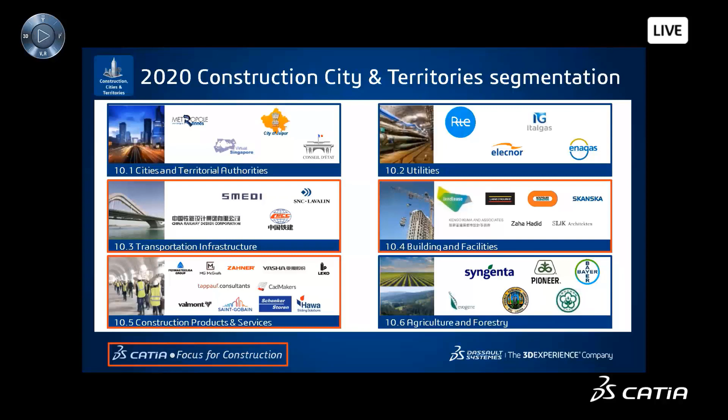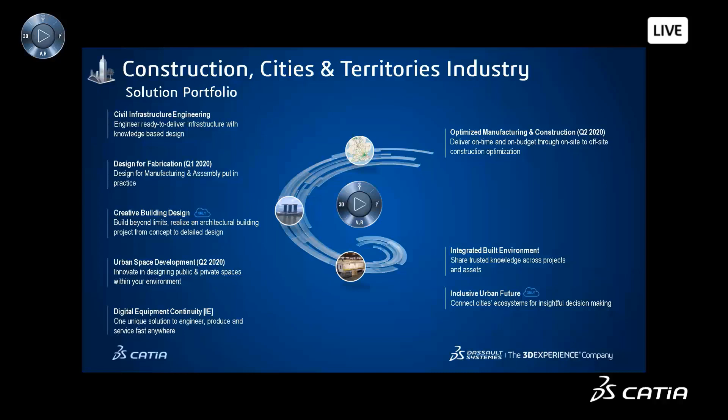Our solution portfolio is structured in a way that addresses each one of those individual segments. For sustainable infrastructure, we're looking primarily at the upper left with the civil infrastructure engineering solution.

A zoom on the civil infrastructure engineering solution, and we see that there are four primary processes that make up this solution: the civil infrastructure design process, the civil structures engineering process, the civil systems engineering process, and the civil construction process engineering process.

Each of these processes have a brand attached, and those brands are the primary supporting brands that contribute to the value of these processes.

Each of these processes then comes with a packaged set of roles, and in 21X, we have completely re-engineered our role portfolio to be industry specific.

This was already the case from CATIA back in 2020X and previous releases. But for 21X, we've taken it one step further and greatly enhanced the portfolio.

So in re-engineering our role portfolio for 21X, we've taken the principle of continuous level of development as a guiding force.

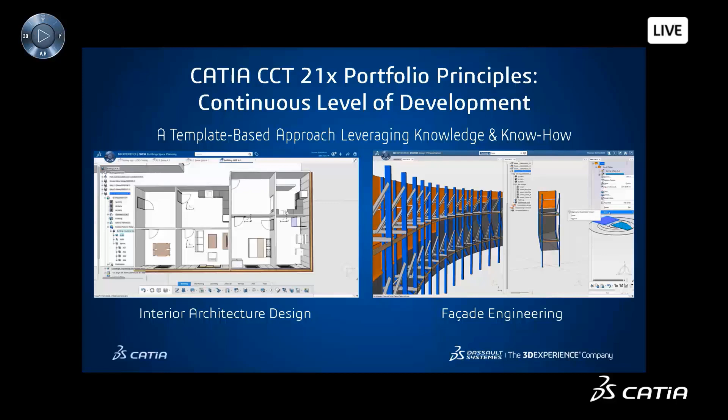And what that means is we've embedded template creation and template instantiation capabilities in a number of roles to allow companies and individuals to leverage knowledge and know-how, embed intellectual property into their templates, and then allow them to instantiate them through either out-of-the-box technology such as component-based design, or to write custom scripts and algorithms to do that automation and instantiation based on specific rule sets that are particular to a given project.

So here we see the 21X portfolio in detail. We have roles that are focused primarily on design and roles focused primarily on engineering. And then they're split. There are a few specific to buildings, a few specific to infrastructure, and a grouping of roles applicable to either building or infrastructure projects, particularly for systems coordination or presentation and review.

On the infrastructure side, we see that we have the computational designer for construction coming out in FD01. We have the civil designer role that's focused mostly on design, and then we have the civil engineering role that can do design or engineering and the template capture and reuse.

This is why you see the roles on the right have been highlighted in red. Within those roles, we have the template designer inside. The old 20X template designer role has been included specifically within these roles to allow for that template capture and reuse capabilities.

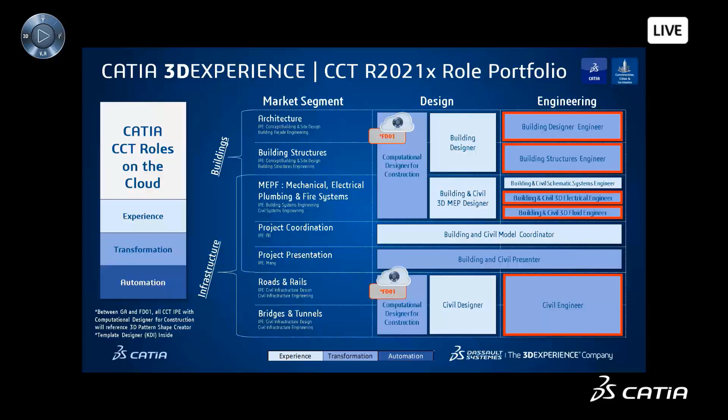Also in 21X, we've released a new navigational system that is accessible through the compass that will allow you to start from a solution experience, navigate to the individual process experiences that make up that solution, and then drill down into the individual roles that are packaged within that process, roles that contribute to the success and overall execution of that process.

Here we're focusing specifically on the civil infrastructure engineering solution. We see that one process within that solution is the civil infrastructure design process, and then there are 6 roles packaged within that process: the computational designer for construction, building and civil presenter, the building and civil model coordinator, civil designer, civil engineer, and templates optimization and rules designer.

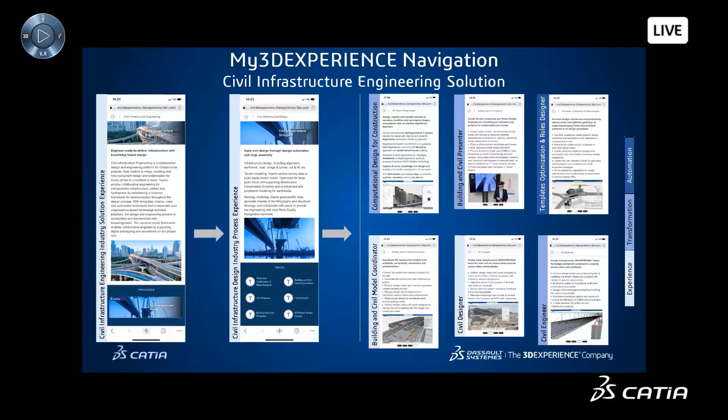This is just one path through the My3DEXPERIENCE. A closer look then at each one of the processes within that solution. We have the civil infrastructure design, structures engineering, systems engineering, and process engineering, and the roles packaging associated with each one of them.

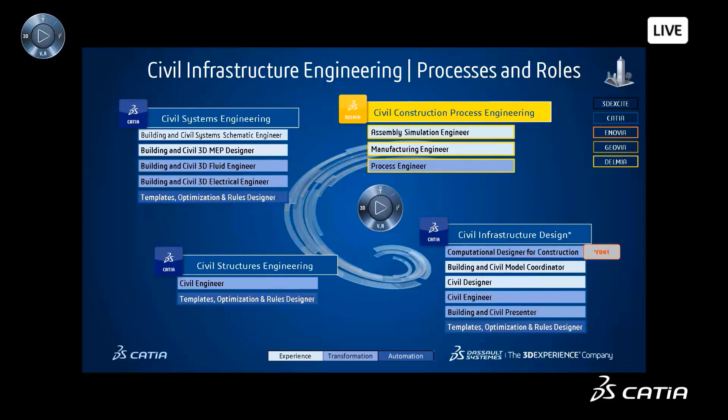We're going to look now a little closer at the civil infrastructure design process and how the roles within that process contribute to an overall workflow that's going to go from ideation to manufacturing for an infrastructure project. First, a quick look at two roles that I'd like to identify individually.

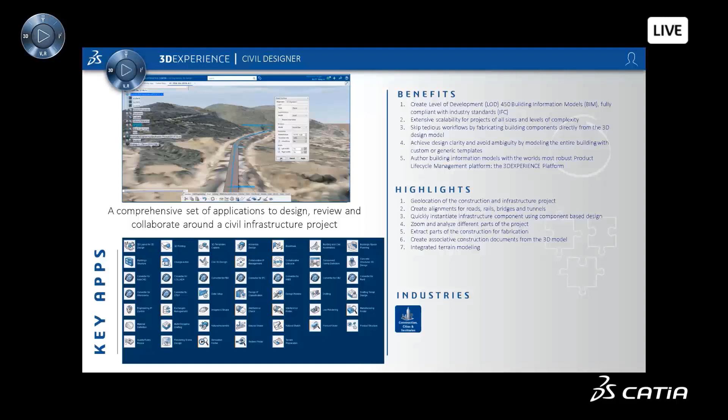The civil designer role contains a number of applications that allow users to do linear infrastructure design, such as alignments, road surface design, rail surface design, that includes super elevation, along with earthworks, excavations, filling, and terrain modeling. This is a very robust role to do design and engineering of an infrastructure project.

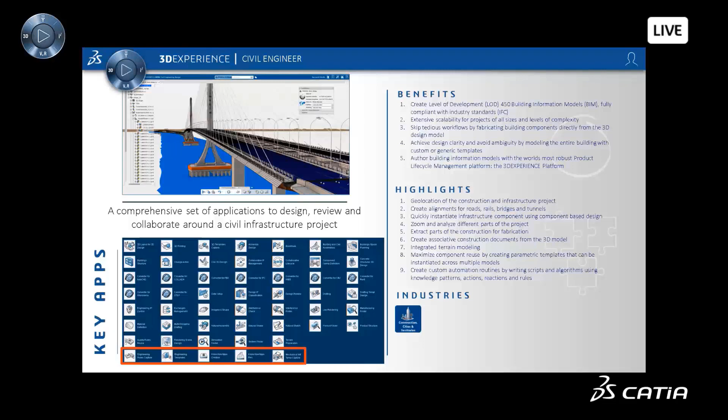The second role that I'm going to highlight is the civil engineer. You see the civil engineer is nearly identical to that previous role. It allows for the design and engineering of an infrastructure project, but we've included additional capabilities that include the template creation and script writing for automation using traditional CATIA knowledgeware like rules, knowledge patterns, actions, reactions, and the capturing of these automation templates. Looking at this process more holistically, we see that there are sub-processes that make up that process.

Traditionally for a linear infrastructure project, the first sub-process is going to be the creation of an alignment. This alignment is going to be situated within the context of a terrain or a larger site within a territory. And then in parallel to the creation of that alignment, there's going to be the design and creation of detailed content or componentry that goes along with that.

Because with any infrastructure project, regardless of scale or complexity, we try to reuse as much as possible similar components. And beyond that, every component is patterned in some way, shape, or form. So there's a parallel sub-process that goes along with the patterning of those components.

Finally, on the right, we capture those components as parametric templates so that we can instantiate them and replicate them in an automated way, using the component pattern specification and the alignment, the context, the overall skeleton design of the model. We run an assembly instantiation, so we're instantiating then automatically those components.

And finally, we're producing design documentation, whether that's 2D documentation or 3D documentation, or the experiential documentation that is virtual reality or augmented reality or other types of immersive interactive documentation. The portfolio to support that then is...

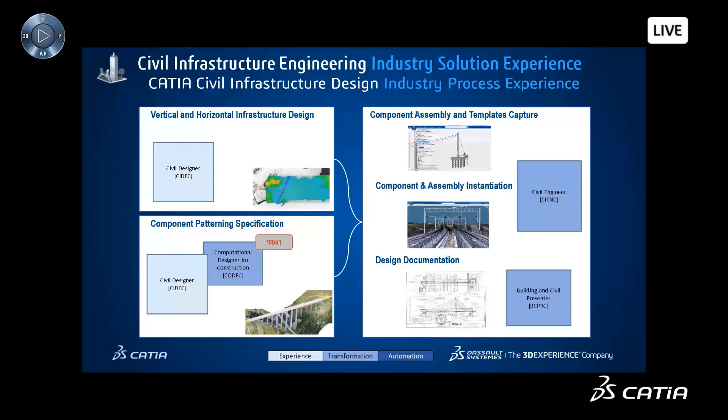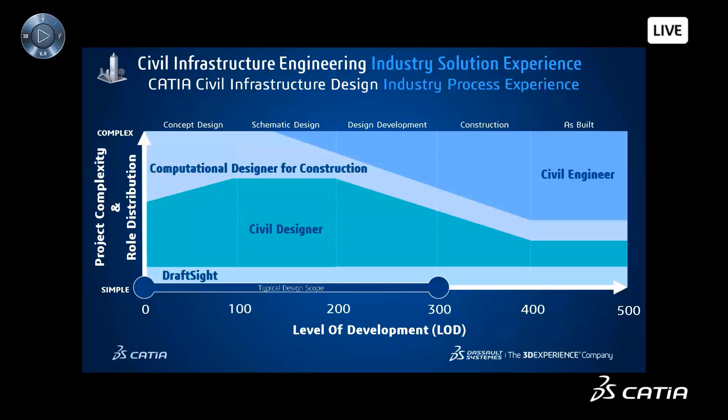If we take a cross-section of any project at any given time, we see that the distribution of roles deployed on that project is going to change from phase to phase and relative to project complexity. So as we move through concept design, through schematic design, to design development, if you take a vertical cut through one of these phases at any given LOD, the distribution of roles at that phase will be slightly different, where we're going to go progressively from the civil designer to the civil engineer as the need for more detail and development evolves with that project.

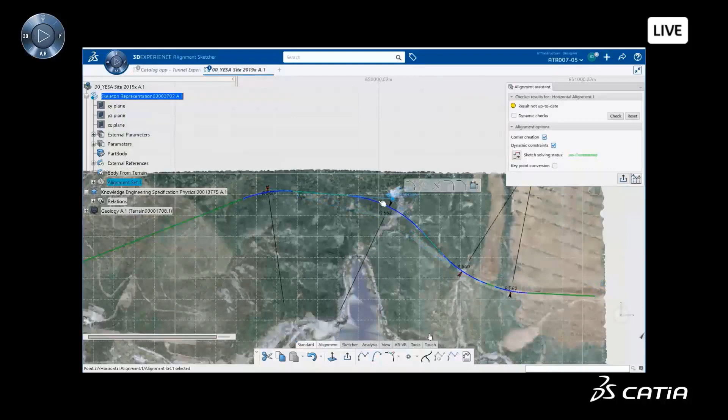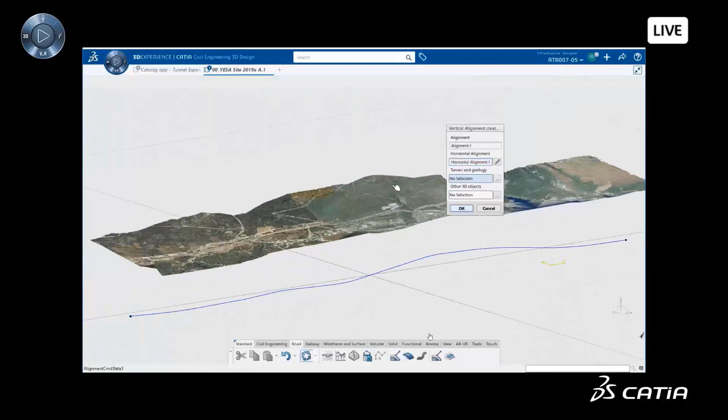Now, a couple of videos to show specifically what each of these roles are capable of. So with the civil designer on a linear infrastructure project, we're going to first start with a context. We're going to bring a point cloud in, mesh it as a terrain, and project the image onto that terrain and start modeling the alignment.

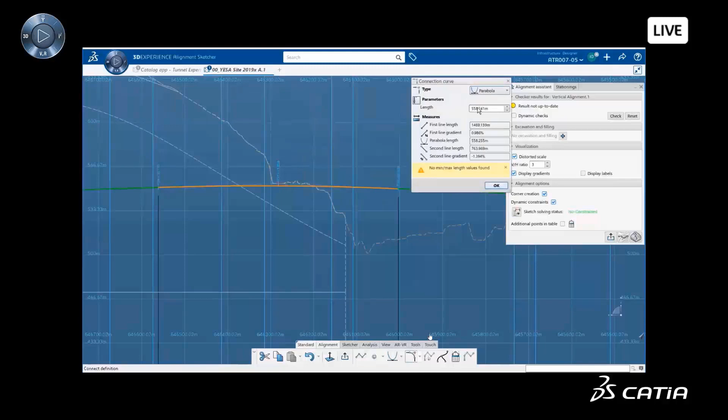First, we'll start with the horizontal alignment to set that out in plan. And then we'll start with the vertical alignment and work in the vertical elevation of that alignment. We'll add transition curves and station points and define at each one of these station locations what's happening - so is this the beginning of a tunnel, the end of a tunnel? Is this the beginning of a bridge? Is this the end of a bridge?

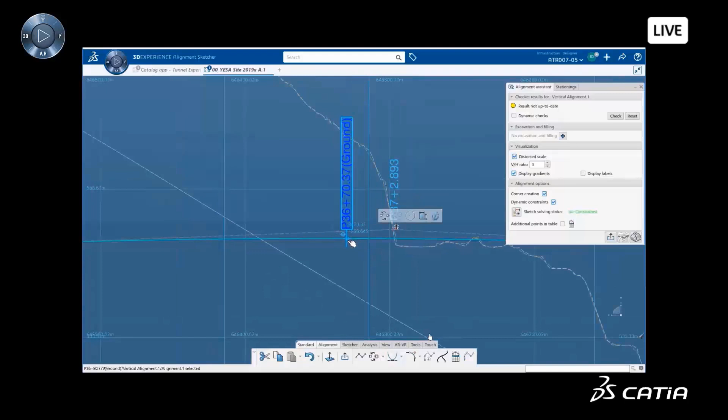And then we can interactively change where those are along the alignment. We can also assign attributes to each one of those stations.

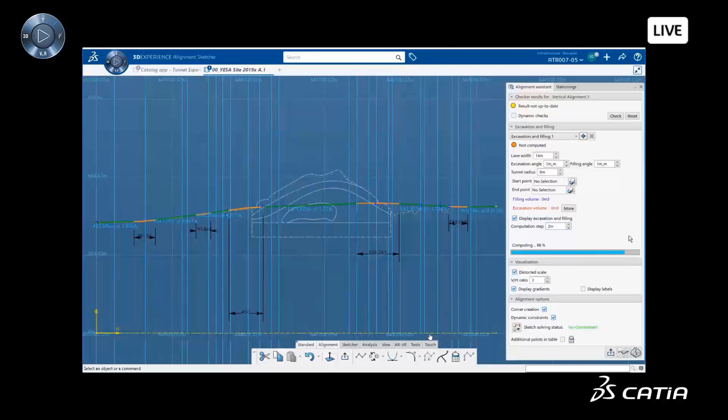We know the beginning of the tunnel, the end of the tunnel, and the terrain we're working through, so we can compute excavations directly through this alignment command.

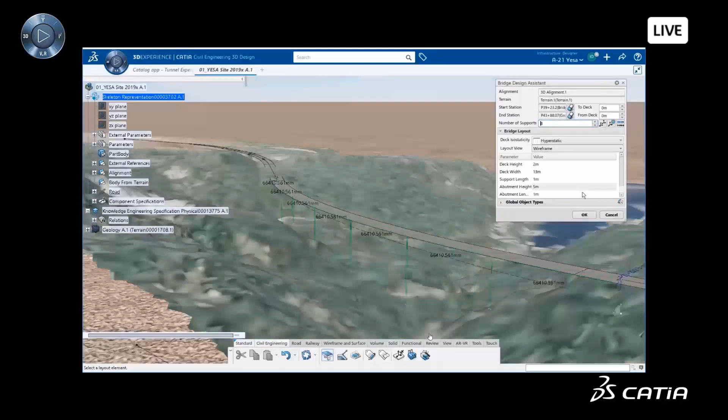When we exit the alignment, we start to create the horizontal surface, and we have what's called the bridge assistant, which allows users to interactively create and design specific bridge segments with the different components that make up that bridge. Users are also able to create their own parametric content.

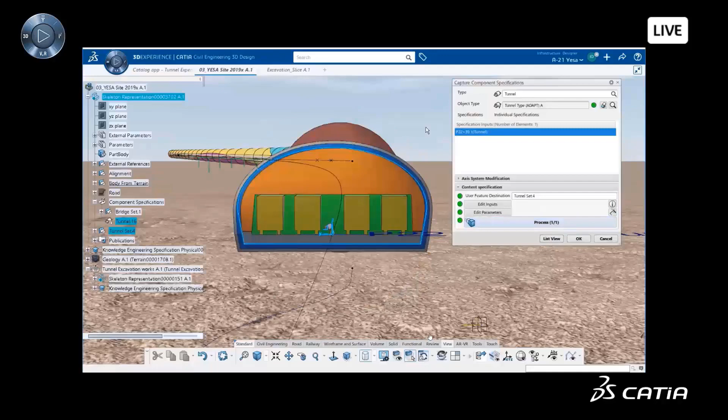This can be used for something like a tunnel. Here we have a tunnel with a number of different lanes as parameters. These tunnel components include not only the lanes and the dividers, but also rebar and all of the ring segments required for this tunnel construction.

Once the design is done, we will navigate the experience with a fly-through to be sure that the design conforms to all requirements that were set out from the beginning.

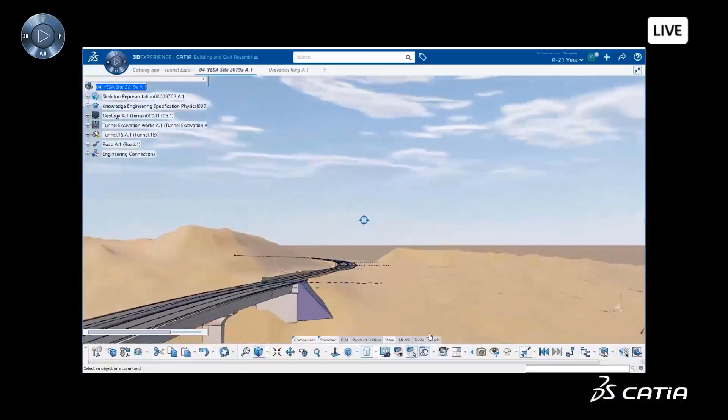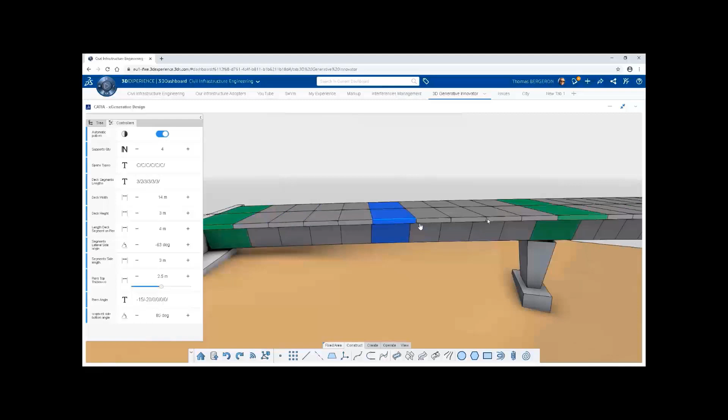Next, an example of a parametric bridge design using the computational designer for construction role. One of the primary applications in this role is xGenerative Design, the algorithmic generative design application that runs completely on the web. Our engineer has designed a parametric and generative bridge with a number of driving parameters.

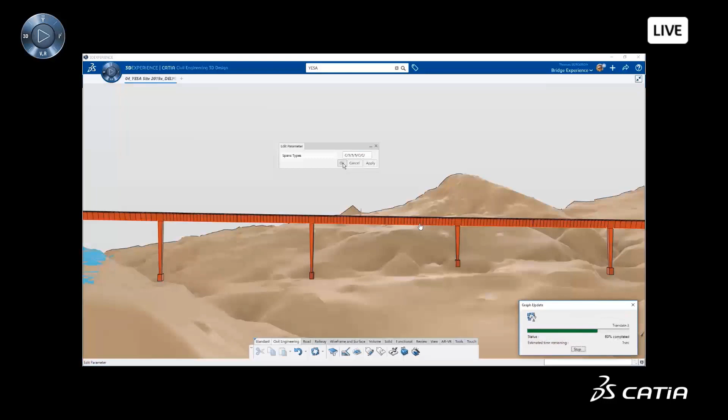That model has been defined as a template, and that template can then be instantiated into a model, and the parameters can be manipulated to perform different design variations.

Once a design variation has been selected as the design to pursue further in detail, we can connect that design to detailed engineering templates using component-based design to automatically instantiate those components. In this case, this component includes rebar.

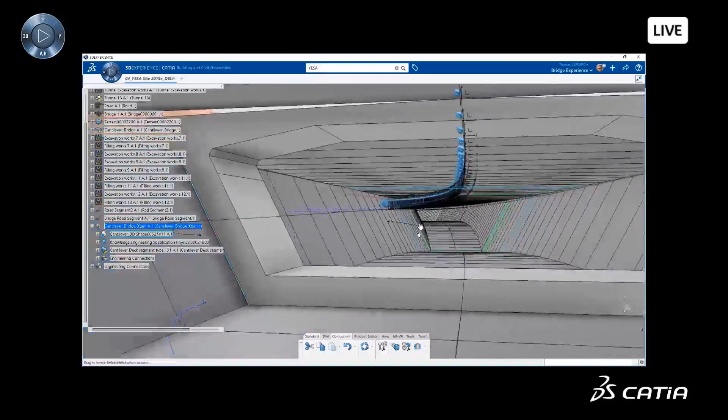Because it's entirely linked through a parametric chain of relationships, when you update the original design, those updates will be directed and trickle down into the detailed components. So when we change the design of the bridge, the rebar is going to update parametrically.

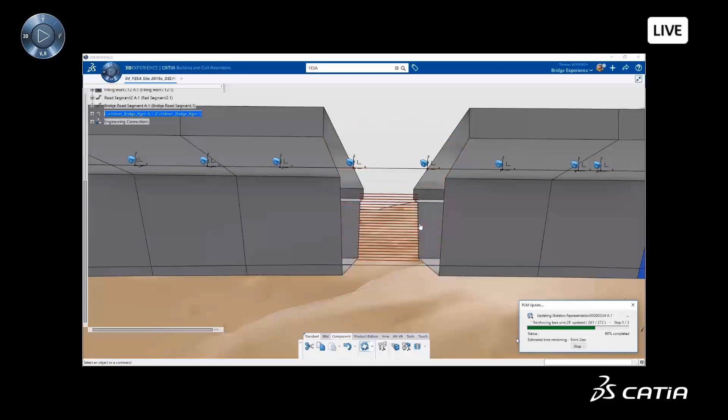So late-stage changes of a project can be absorbed further and further downstream without any massive rework or redesign. Finally, with the civil engineering role, once our design has been created and we've explored design variation...

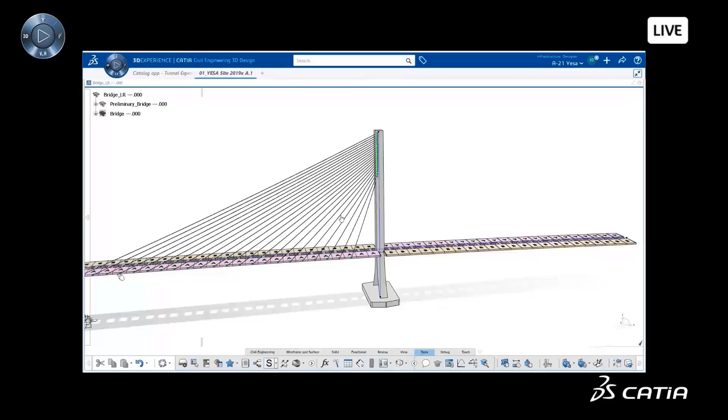...and we're ready to start building with detailed componentry for manufacturing, we can use a civil engineering role to capture these templates for manufacturing and instantiate them automatically using component-based design again into our contextual model.

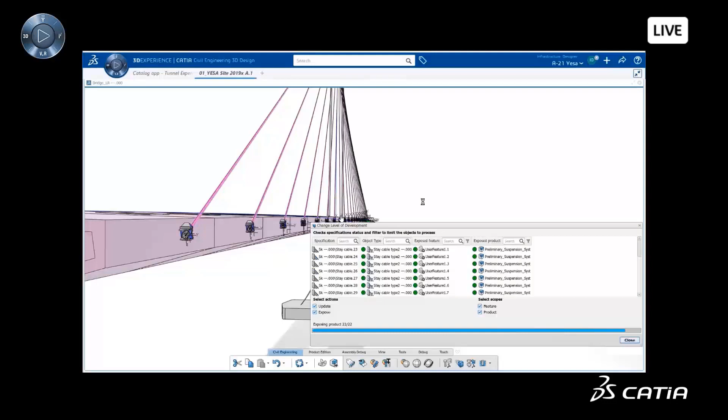In this case, with this suspension bridge, the cabling stays have been modeled to a high level of detail, and we're going to instantiate them automatically using the light skeleton model as a contextual reference. We will do that for all components, all elements of this model, including the decking.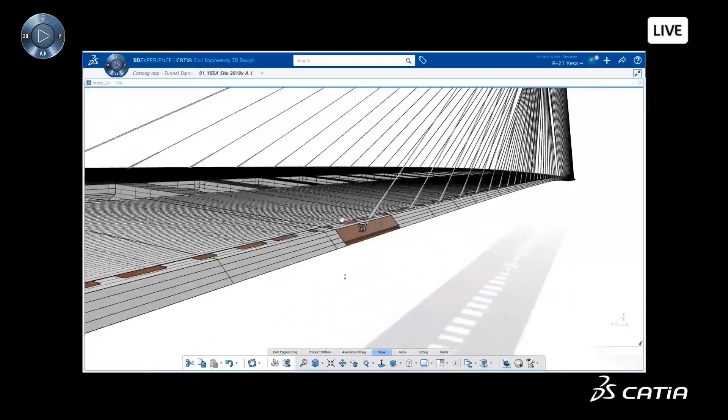So there you see an overview of our CATIA solutions for civil infrastructure, design, and engineering. We're more than convinced that with these set of solutions, we're able to perform, execute, and deliver on our promise to shape the world we live in.

Now, with our customer roundup session, we will discover innovative customers in the field of infrastructure engineering. They all have in common the use of CATIA and the 3D Experience platform to push further their own capacities to provide sustainable innovations in their fields.

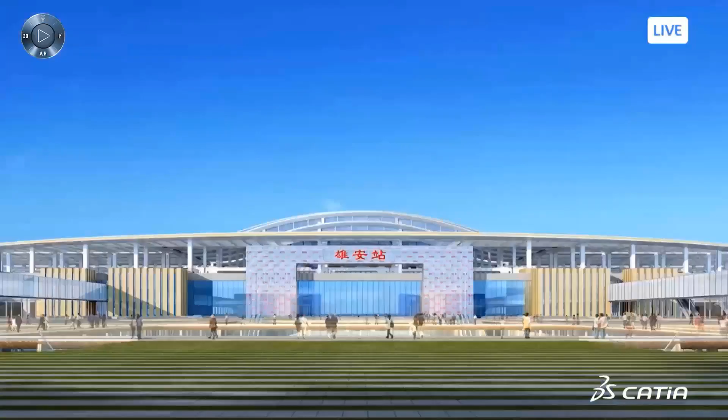BIM technology enables project excellence of Beijing-Xiong'an Railway. Project overview: Beijing-Xiong'an Railway connects Beijing and Xiong'an New District. The main line is 92.8 kilometers, including 5 new stations: Huangcun, Beijing New Airport, Gu'an East, North Bazhou, and Xiong'an. Control and key spots include Airport Number 2 Tunnel, Xiong'an Station, and over 20 major overpass projects.

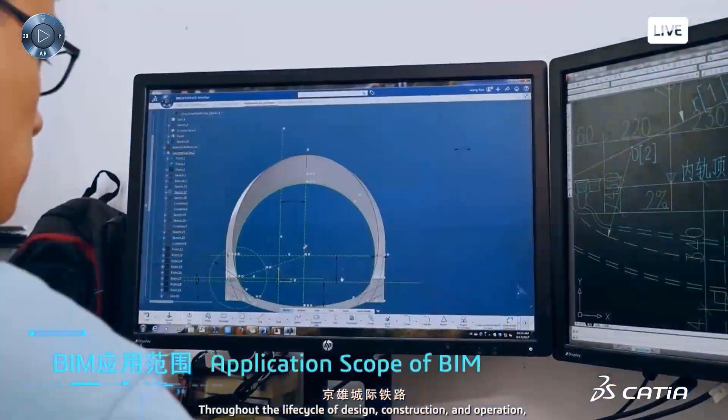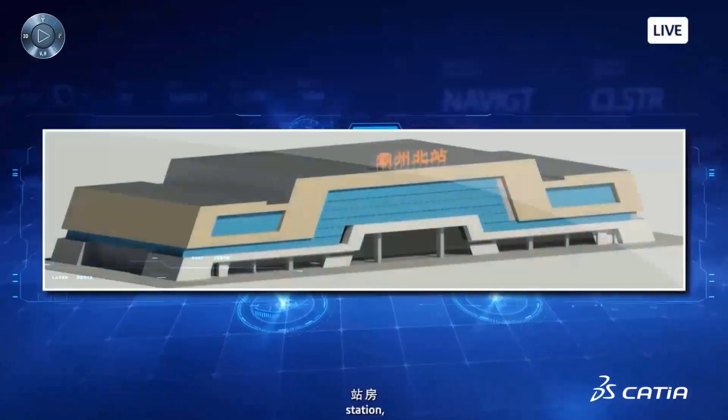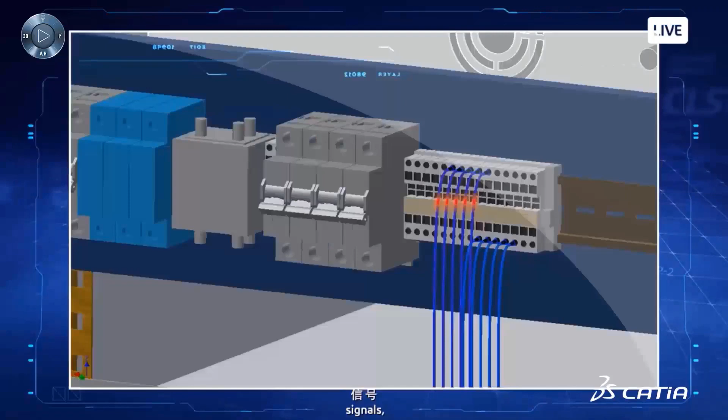BIM design: throughout the life cycle of design, construction, and operation, 3D Experience is adopted for multidisciplines, including bridges, tunnels, subgrade, station yards, station, tracks, electrical, communications, signals, traction transformers, catenary, piping, and vehicle place.

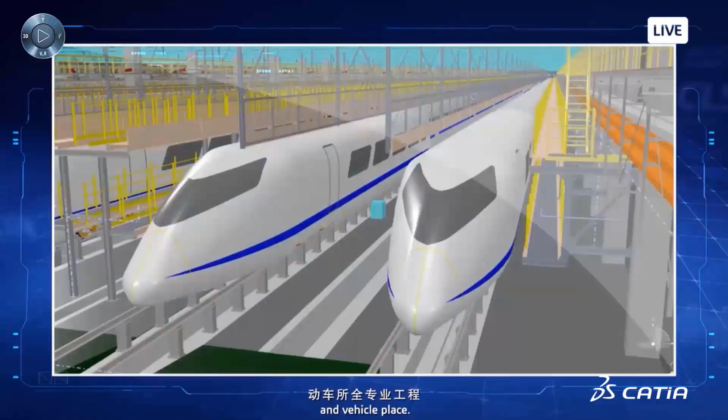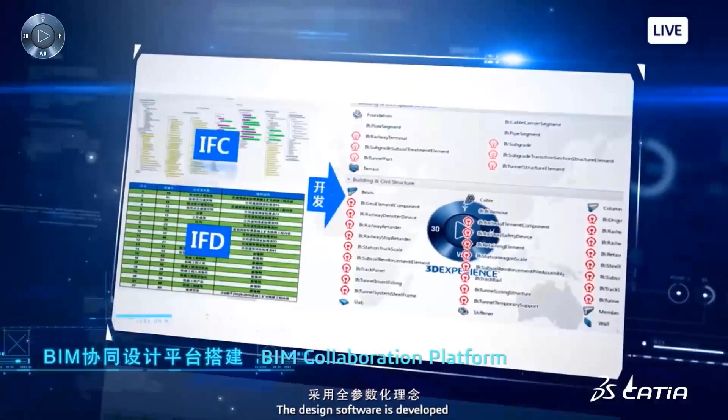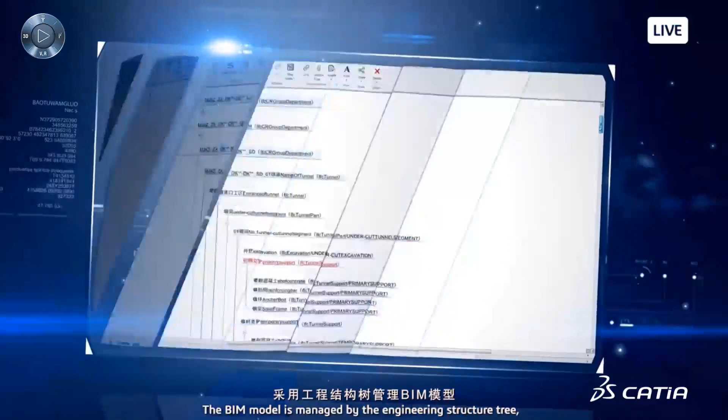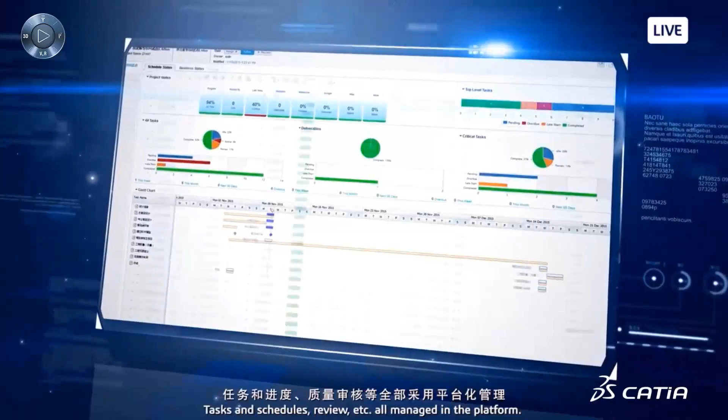Creating a railway design collaboration platform on 3D Experience, incorporated with China Railway BIM standards. The design software is developed with parametric technology to achieve high efficiency in designs. All disciplines carry out real-time collaborative design based on a single data environment. A unified framework is adopted to realize the standardized exchange of cross-disciplinary information. The BIM model is managed by the engineering structure tree, and the entire design process is integrated. Management and design data share a single data source. Tasks, schedules, and reviews are all managed in the platform.

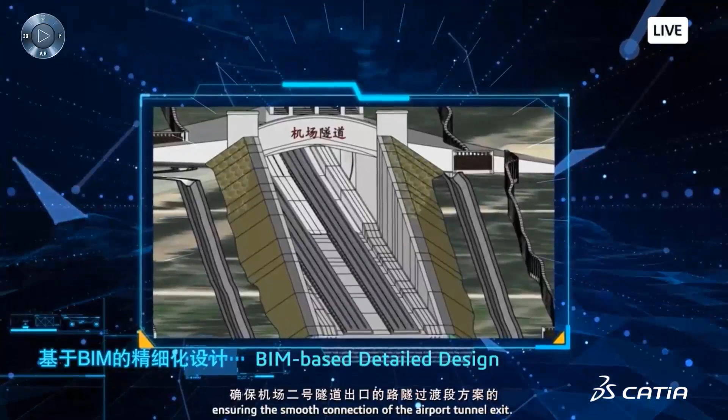Using collaborative 3D Experience to optimize the curve layout of multi-line bridges and the relationship between multi-line and the bridge structure, improving the system structure and constructability of designs. Through multidisciplinary collaborative design, ensuring the smooth connection of the airport tunnel exit, for the first time in China we achieved one-to-one high-precision 3D modeling for the entire railway line.

Using 3D Experience, the detailed 3D design of number 0 block of long-span continuous beam is done, optimizing pre-stressed tendon and structural rebars.

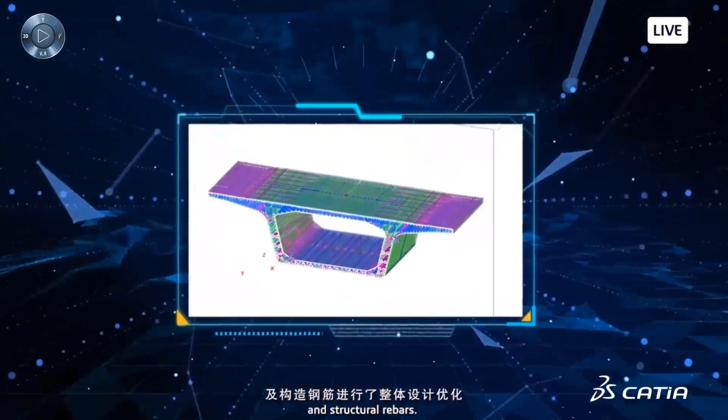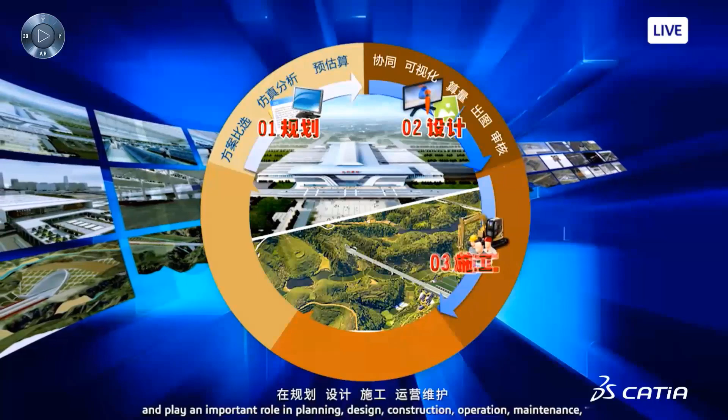With strong motivation from China Railway, 3D Experience technology is developing in the railway industry rapidly and plays an important role in planning, design, construction, operation, maintenance, and reconstruction throughout the entire life cycle of projects.